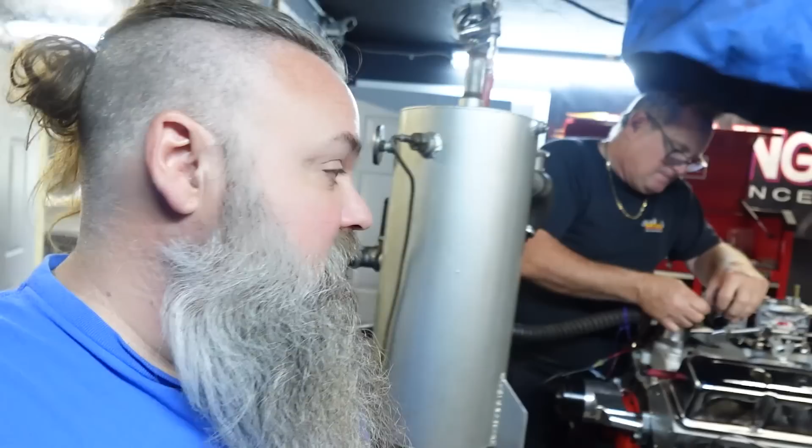We're going to start with doing jet changes, and it's a square setup in that carburetor, so we went from 87s to 91s. We're going to change from 91s to 95s, I believe, and then start changing things from there. Let me get all the pieces, parts inside. We'll go straight to changing out jets, going up another 4. So we went from 87s to 91s, 91s to probably 95-ish.

Where's that sheet you had that compares the drill sizes?

Also, for those curious about our dyno results from yesterday, we spoke with the gentleman that does the dyno software for this thing, so we're able to look at this differently, and we can confirm that it does cross over at 5252 where it's supposed to. It just looks weird on the RPM dyno sheet - on this it looks improper, but when we do it over time, we can verify, and if we look at the raw data, it does cross over at 5252. In our case, it crossed over at 470 horsepower, 470 foot-pounds of torque, I believe.

You can see our AFRs here are still pretty lean, so we're gonna knock that down and go for more fuel. Then as we add more timing to it, it's actually going to lean that out because we're introducing more air to that system. So we got to get this part figured out first, then we'll go after some timing and see where we end up. The nice thing is we've got a lot of data from other dyno pulls to compare to - like when Eric and Nick were here the other day, they pulled a very similar motor, 406, 10.5 to 1 compression essentially.

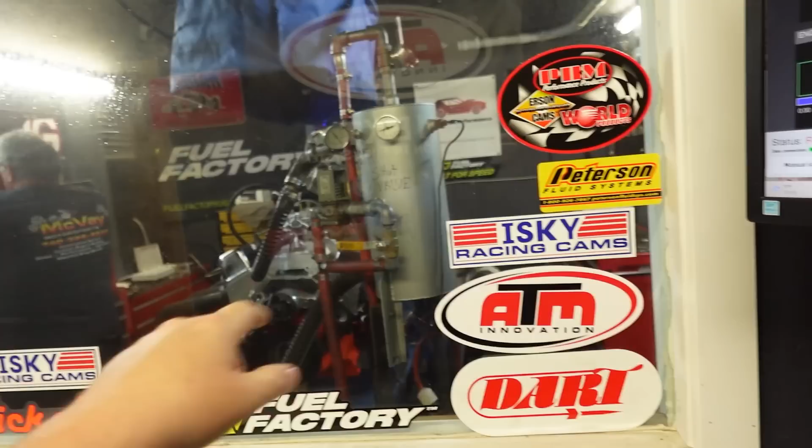Numbers before we start making a pull: 406 cubic inch small block Chevrolet, Jegs 205 heads, Jegs Cool Gap intake manifold, 535 camshaft, 1.5 rockers on intake and exhaust at this point in time, ATM 1050 carburetor. See what she makes. Time to put in your guesses.

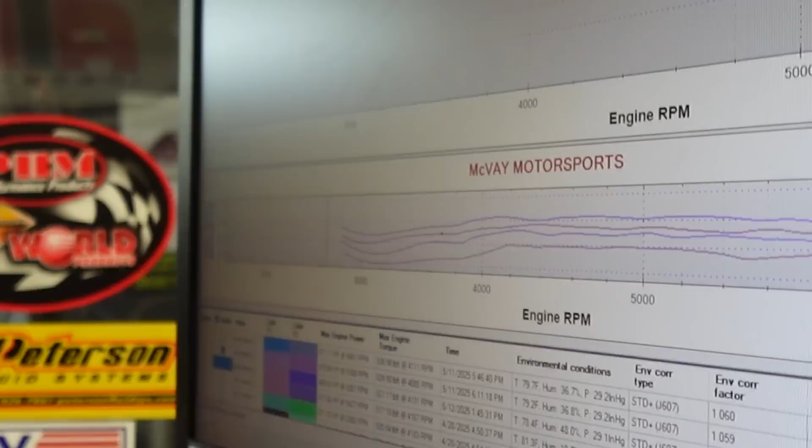It went up and made less power. Leaner is meaner, right? That's what I said - leaner is meaner. So the curve time graph looks very similar to last time. What is it, 466 at 5200, 427 at 4100. And the oil was probably not as hot as it was yesterday. See how it got richer? Got richer and made less power all the way across the board. Cleaner though, cleaner, but cleaner.

What's the... I don't like this RPM. I don't like it at all. I agree, it's harder to read. It makes it much more difficult to read.

See, it gained from there to there. Yeah, it gained almost a point - three quarters of a point. So the jet change brought half to three quarters of a point all the way across the board. Still, honestly, a little, depending on which of these AFR gauges are correct, somewhere between 12 and a half and 13 and a half, which is within tolerable ranges. The old adage of leaner is meaner obviously still makes sense. Our EGTs have come down maybe 50 degrees or so, a little more than that, so that's good.

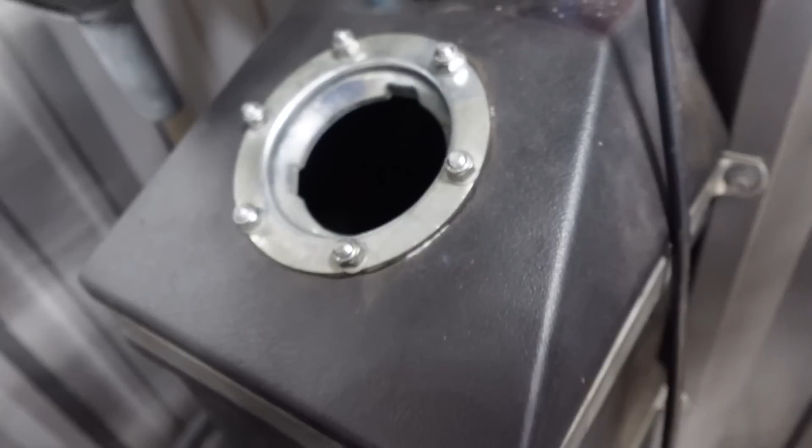Ain't got no gas in it. It's got fuel. No.

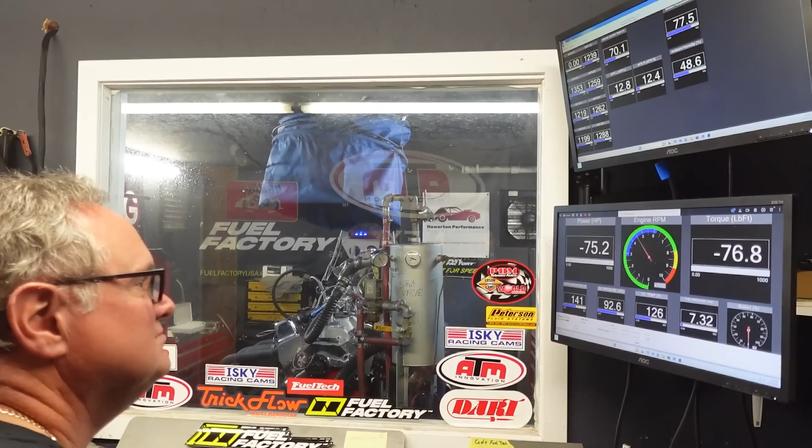Like that. So it went up from 471 to 479. Yeah, and actually made more torque too. So you moved up the power band. Let's see what the 100 did. 120 RPMs and moved it. Wow, okay.

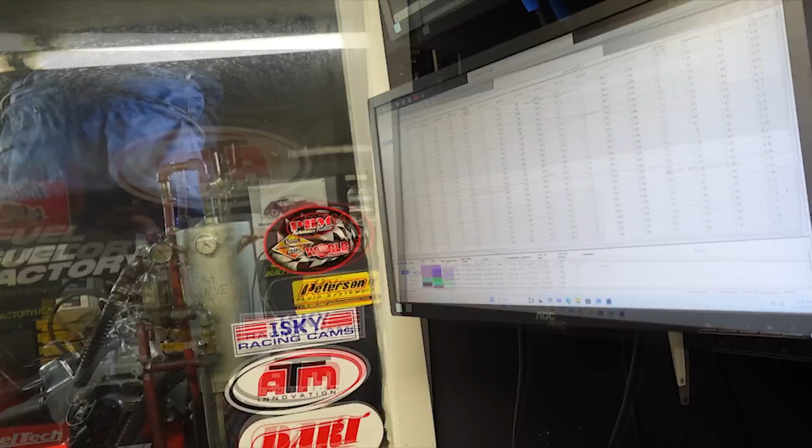Liked it all across the board. Came down and we got, actually it shows it richened it up a little bit. Okay. Yeah, this is 12 and a half, which is notoriously where everything likes to be. 50% humidity is good times. Let me see your spacer.

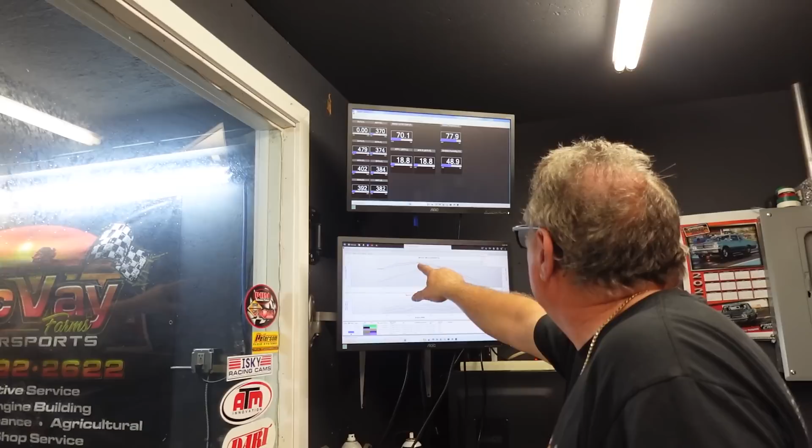Look at that on the RPM scale. Oh, ain't that a nice pretty? Yeah, it made more power all the way across. You see, it took that hump out of it there. Yep, you really liked it. And especially for a dual plane, it doesn't have a lot of wonky crossover.

So here's a question: does it make sense to throw more timing at it? Well, I'm gonna leave it where it's at. Okay.

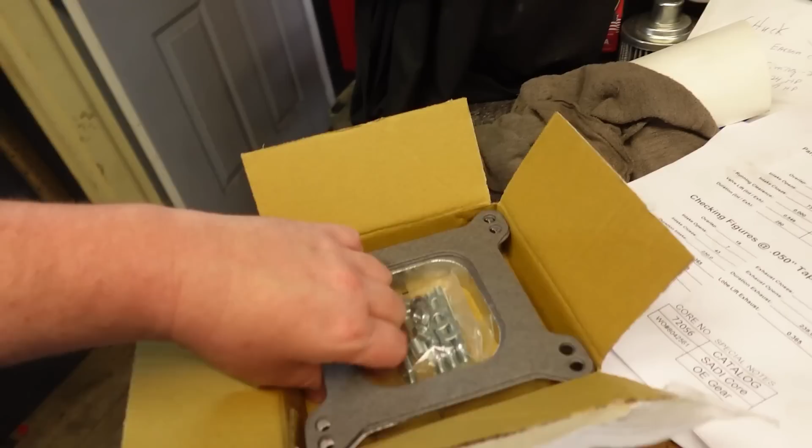All right, so open spacer, that's what Eric said we need to use. That's what we will use. You want to make any tweaks at all, or just pull this off, put a spacer on it? Yeah, put a spacer on it. Okay, traditional knowledge says this is going to make horsepower, usually at the cost of torque. It'll move that band just a little bit further, make more power. So we'll see what that does.

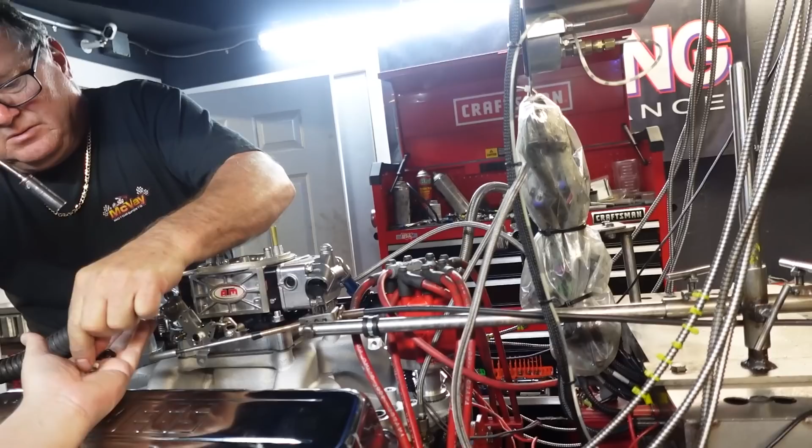All right, no more changes, just the spacer, right? What did you do with the other two nuts that you had on there? They had shoulders on them. They should have, oh the black ones? Black washer on them, I had black ones that were down in there. Like keeping the same. Alright, so 1-inch spacer, not touching anything else.

Alright, we had 479 on the last pull with just timing added. Now we got a 1-inch spacer on it. How much do we pick up? How much do we lose in torque? Do we pick anything up? I'd say we're gonna see 5 horsepower, lose 3 foot-pounds of torque. That's my guess, what do you think?

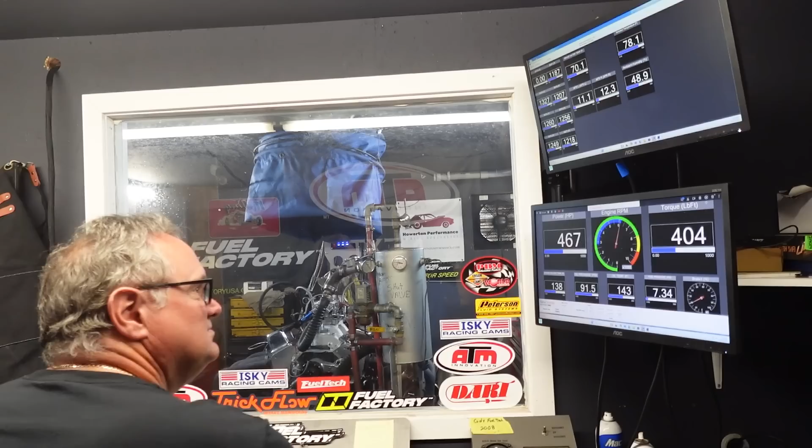Exactly what I said it would do. Steal from the torque, hand it to the horsepower. So 483 and 526.

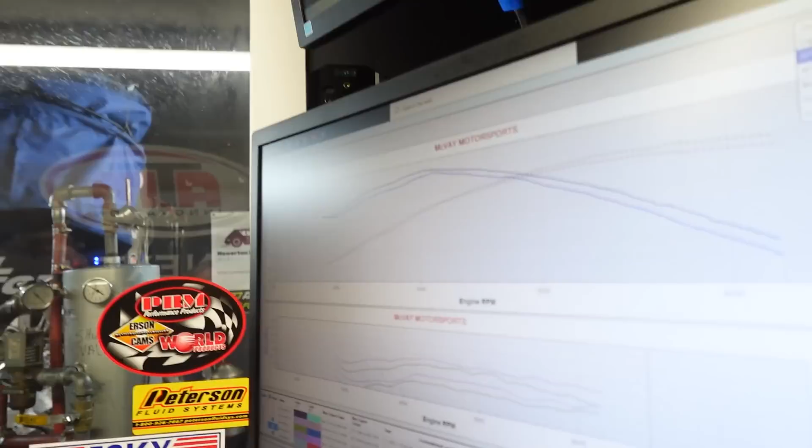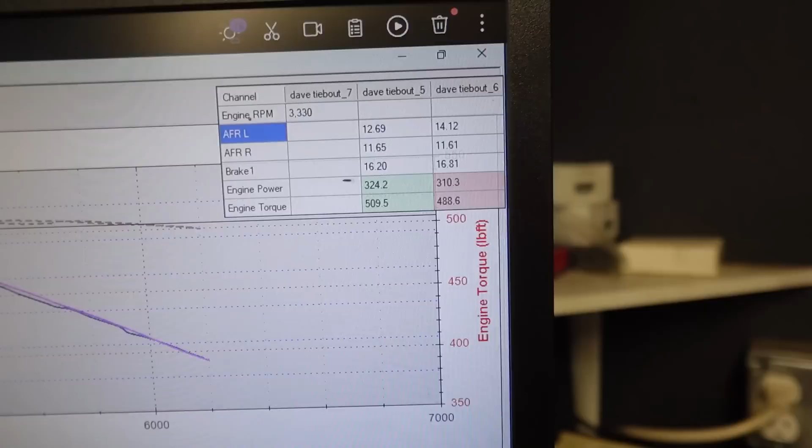I don't know that I would run that spacer. So this is the run without the spacer, that's the run with the spacer. The amount of area under the curve here, that you're missing torque. Yeah, but it's only, I mean, the split is not insignificant. It's probably 10, 20 foot-pounds of torque difference between those two. It depends on what you're wanting, 10 to 20, whether you want it on the car or not.

Yeah, I mean, you're going to pick up a little bit. Yeah, you gain a little bit out on top. And the question would also be, is there more timing that you could throw into that thing that would make any difference? But if you look at the... What's the plug look like? I mean...

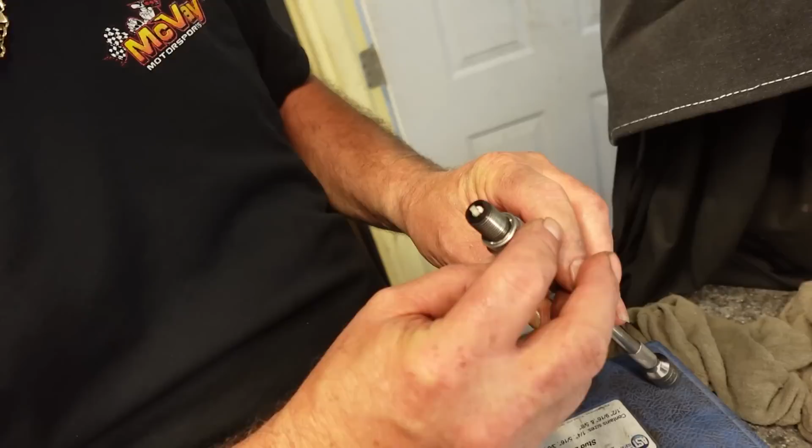I guess to me it isn't worth it, the timing isn't worth it. Yeah, if it's going to put it into the danger realm. Yeah, if you get maybe like you're gonna get 20 horsepower or more, out of a degree of timing, 2 degrees of timing.

You want to switch to the other plugs that I've got? I got a brand new set of 9s. I think I've been here before, is why I'm saying that. Yeah, I'm sure. Done this rodeo before? Yeah.

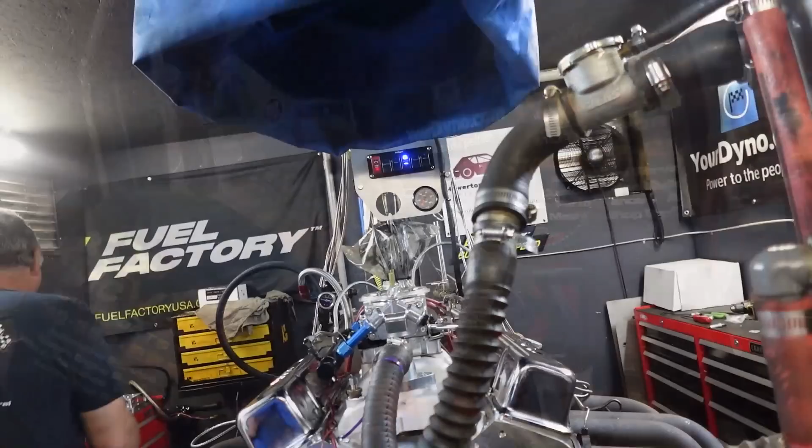I think we're just squeezing. Yeah, so you want to go 1.6 on the exhaust? Yeah, okay, so pull valve covers off, switch to... so what we could do is pull the plugs out of it, and then help us turn it over and exhaust, and then we'll put the new plugs in it. Yeah, okay. So pull valve covers, we're going to pull the plugs out, make it easier to roll this thing over, we're going to put the new spark plugs in it, and 1.6 rockers just on the exhaust and see if that helps us out. The question really is, where's the restriction in the system? Is it on the breathing in side or is it on the exhaling side? So the 1.6 rocker should help us expel that exhaust gas. We'll see what it does. The nice thing about doing this on a dyno is you can really truly actually test and verify this kind of thing.

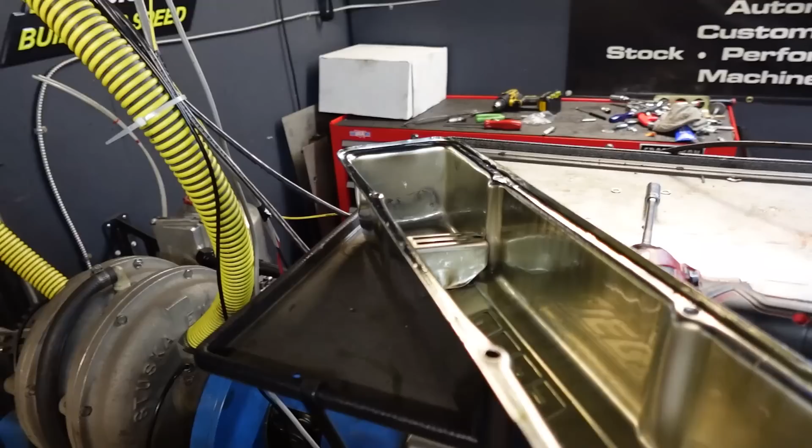Rockers are hitting the valve covers. So Bob's going to get some real race car valve covers. We'll see what happens.

Didn't care. Wants to run backwards, it wants to run backwards. So that didn't matter. Lost 10 horsepower. It almost made power down a little bit more down low and lost it up top. Interesting. That's not what I was expecting.

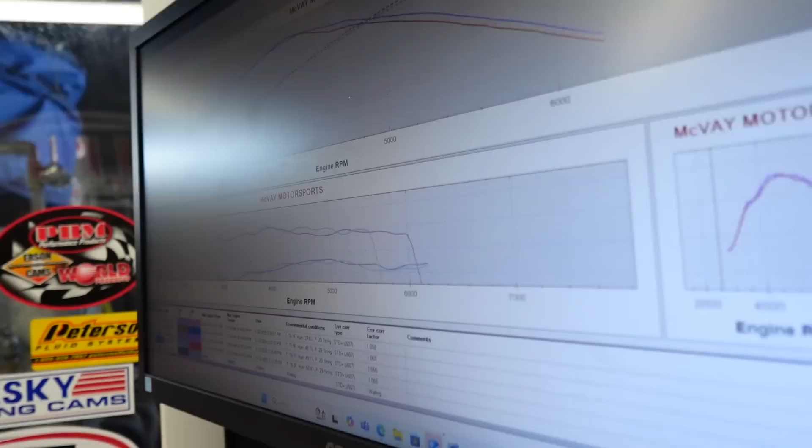AFRs more or less are unchanged. Would you want more timing with that? No, it isn't like we're trying to go from 25 to 35 degrees, we're trying to go 2 degrees. To get 2 or 3 horsepower isn't the option, I'm trying to get 20 horsepower. And if I can't make it there, I don't think it's going to make it.

So, you want to switch back to the 1.5s, take the 1.6s off? Well, we can, but I don't think there's any change in valve lash or any of that type of stuff. If you're going to change something, you've got to change the intake.

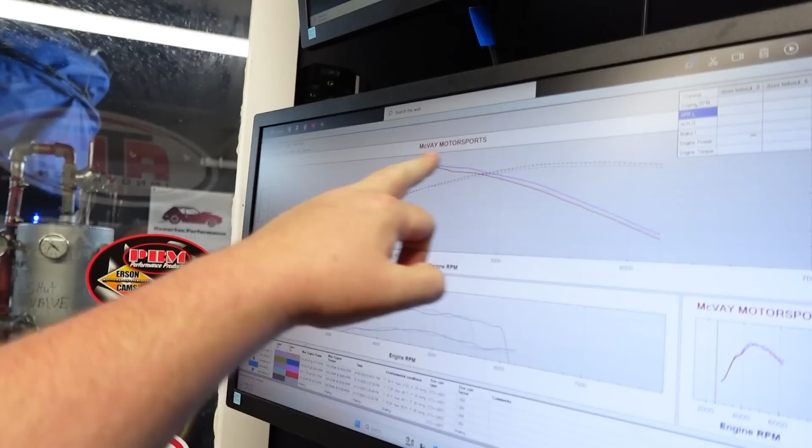We can put the 1.5s on there, but it did not change it. Yeah, it lost power. And it lost it in like a usable range too. So... I'm kind of shocked. I am too. Well.

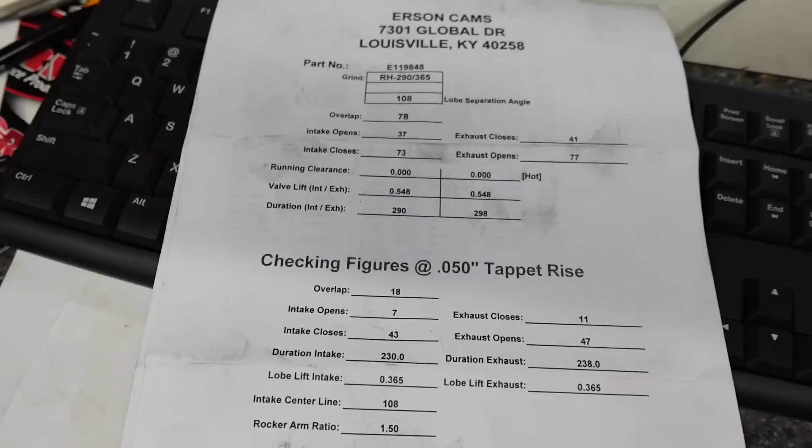So we went from -- for all of you guys who want to see the cam card, there she is. So we're essentially multiplying this because this is factored at a 1.5. And when you do it with a 1.6, it becomes, instead of like a 550, it becomes like a 580 lift, but only on the exhaust. But that also changes a lot of other things as far as how long that goes.

So what we're going to try next is new intake rockers. We'll see whether or not this makes any difference. And if it doesn't, we'll take this thing all the way back to 1.5 rockers and valve covers that we used before.

Now I do still have the other carburetor that we can throw at this. We could probably add a little bit more timing, but it's probably not going to make that much difference. And also you get to the point where

You don't really want to run this thing at 10/10. You don't want to run on the ragged edge of max power if it's more stressful or more dangerous on the engine. Splitting hairs over 5, 6, 7, 8 horsepower, you're not going to feel that in the butt dyno anyway. So why put the extra strain and stress and risk on an engine that's not going to be drag racing? This is a drag and drive hot rod power tour motor. It's supposed to be great in a car and be able to drive from point A to point B, put 12 or 1,300 miles on this thing, cruise, make good noises, and it would still make a hell of a pass. It's not like it's a dog of a motor. It would make plenty of power. But it is what it is.

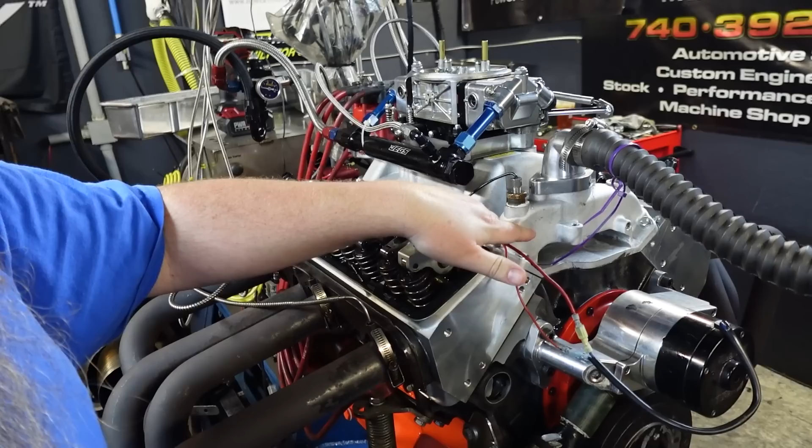What do you guys think so far? Where do you think our bottleneck is? Where do you think our restriction in power is? It makes plenty of torque, 530 foot-pounds of torque is great. But where's our issue with horsepower? Why is it not making more horsepower than it is? It's got a 1050 CFM on it, a 1-inch spacer on it, a dual plane intake manifold, but it is the Air-Gap one, so it should be good as far as airflow goes. Got 205cc intake runner heads, 10.5 to 1 compression on the bottom end, pretty decent camshaft. Where's our restriction?

Maybe it's the intake rockers. We'll find that out in a second.

All right, all 1.6 rockers. Still in the old plugs, we haven't changed those yet. Try and keep these one variable at a time.

This is gonna make more power? No. No idea. No, I don't think so. You don't think so? Think we're gonna lose power? It's possible. Because of those race car valve covers you put on here.

No other changes, just rocker change. So we should be at 580, somewhere in that range. Max lift, I think, on these heads is 600, if I remember correctly. So it's interesting to see whether or not this makes more power, or if we lose power. Please don't lose more power.

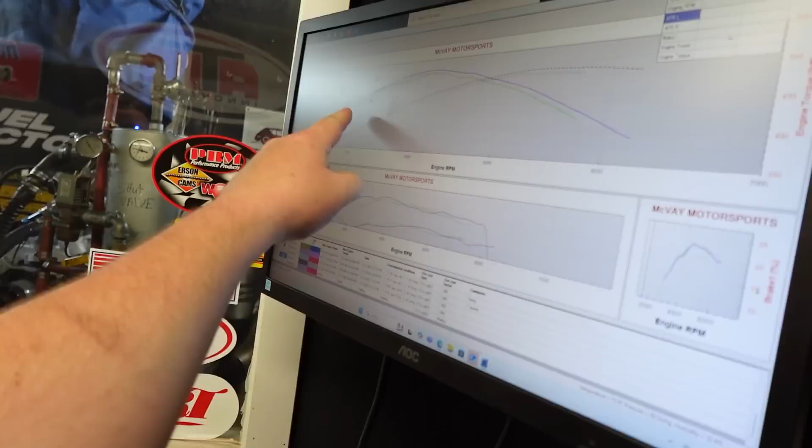I'm gonna explain something to you. A dyno number has never won the race, never. But all the expensive things and all the fancy tricks are making it less powerful. Hang on a second, it made a lot more torque up here, and then it laid over, and then laid over.

The AFR stayed pretty much where it needs to. So what's the answer to that?

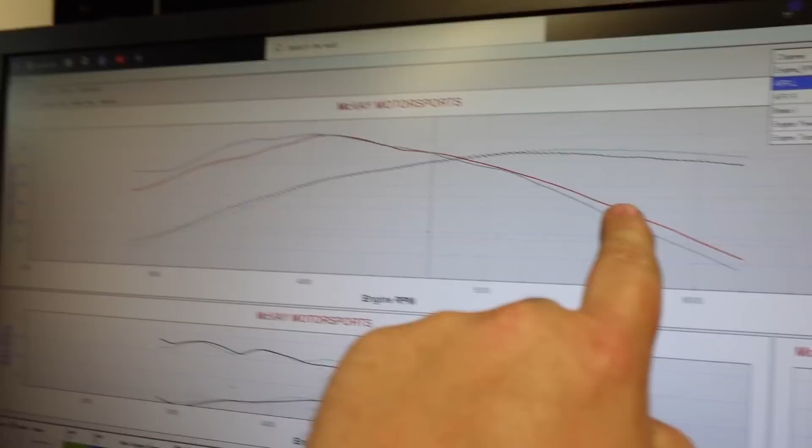Alright, so that's with the 1.6 exhaust rocker. That's with the 1.6 exhaust and intake rocker. So by giving it the intake rocker, we picked up a bunch of torque here, but we actually ended up losing torque out here, which means we lose horsepower out here, which is very interesting. I'm more for that low end torque, especially for a street drivable motor.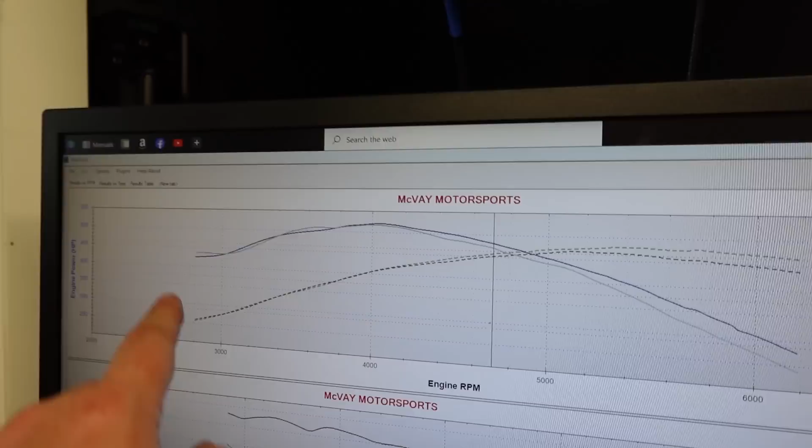Let's drop this one out and compare that against this one, which was just timing on the 1.5 rockers. And it made almost the identical sweep in torque, and then it carried it better. That was not what I expected. Not at all.

What's in your mind? Processing, processing, please wait. What? What? You guys working hard? Now this is my kind of work right here. Yeah, I know, me talking, somebody else working.

Alright, so just got off the phone with Eric Weingartner, he who knows all about head flow and that kind of thing. We do not know what these heads flow. If they are 240 CFM at 550 lift, we're probably running into a restriction as far as the intake goes.

What we are going to try next is we're going to flop those rocker setups. Instead of running 1.6s on the exhaust and 1.5s on the intake, we're going to flop that around, run 1.6s on the intake and 1.5 on the exhaust, to see if that gives us a better power band, because doing it off the exhaust only did not make sense. Doing it off the exhaust and intake did improve it back to kind of where it was, but it's still down on power. Oddly, the best power we've made thus far is just literally off of timing and some jetting.

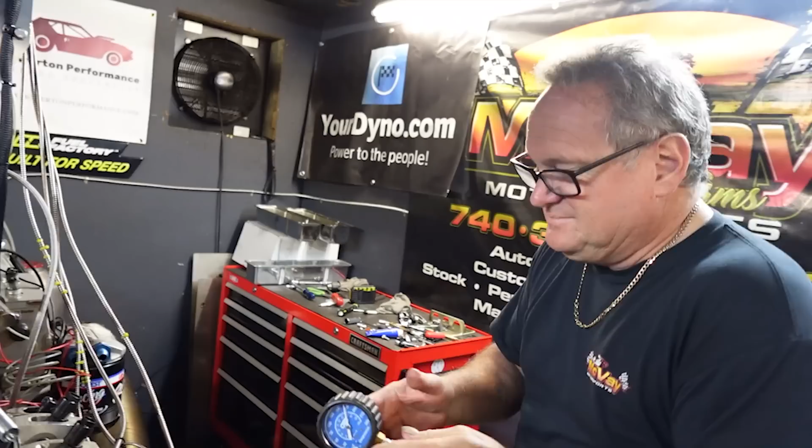Whoa, almost 200? 210, whoa. 20, and I can get 205. Whoa. That's a lot of crank compression.

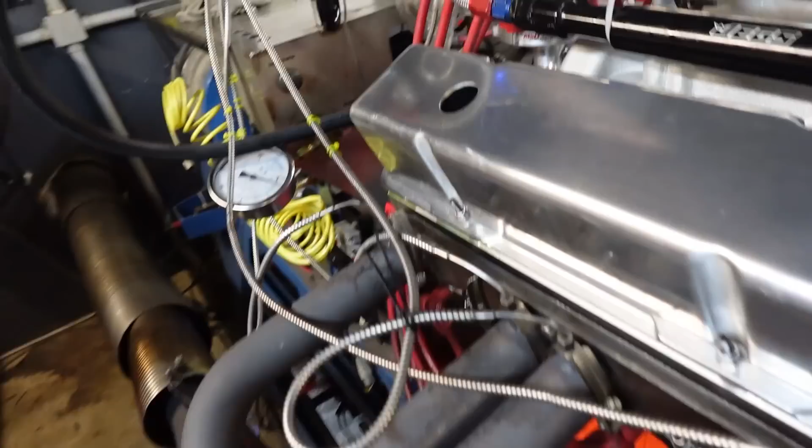Getting some heat back in this thing because it's been a little while since we had it down. Check, make sure we don't run out of fuel. Yeah, got plenty of fuel. So this is 1.6 on the intakes, 1.5 on the exhaust. Timing's the same, jets are the same, nothing else changed. Please God, find me my horsepower I'm missing.

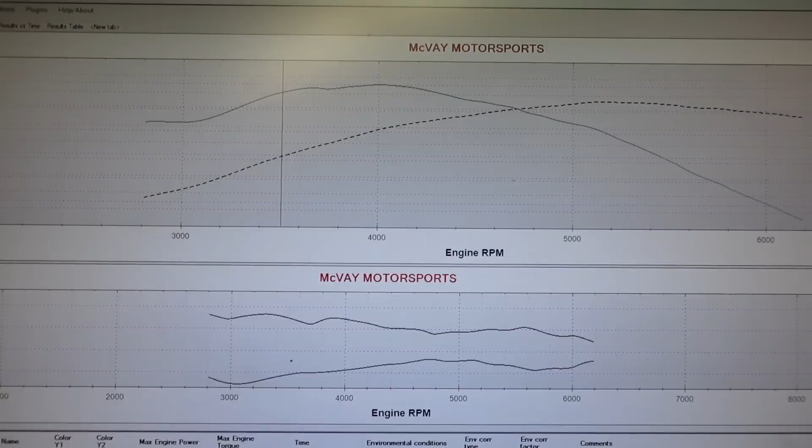Okay, so you can tell by my face I'm not excited about this. There's our run that we just finished. Peak power is 467 horsepower at 5166, and peak torque is 531 at 4,000.

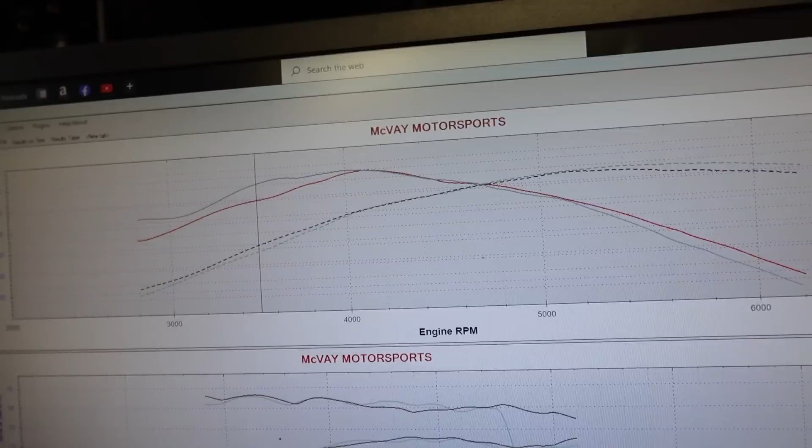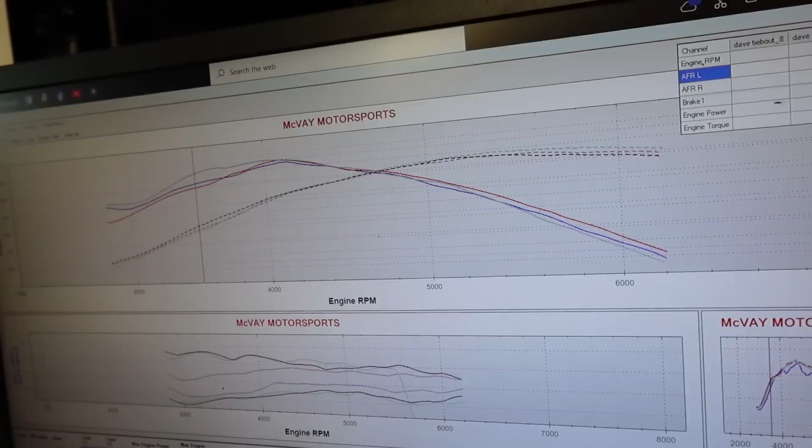But if we compare this versus the last one where we ran 1.6 on intake and exhaust, it picked up torque down here, but it's losing horsepower as it goes up in the RPM range, which is frustrating. And if we load it versus our first test of today, when we did jets and no other changes...

I apologize, I'm sure this is probably annoying to watch me do this, but if we compare this to the timing and the jets - so this is our most recent run.

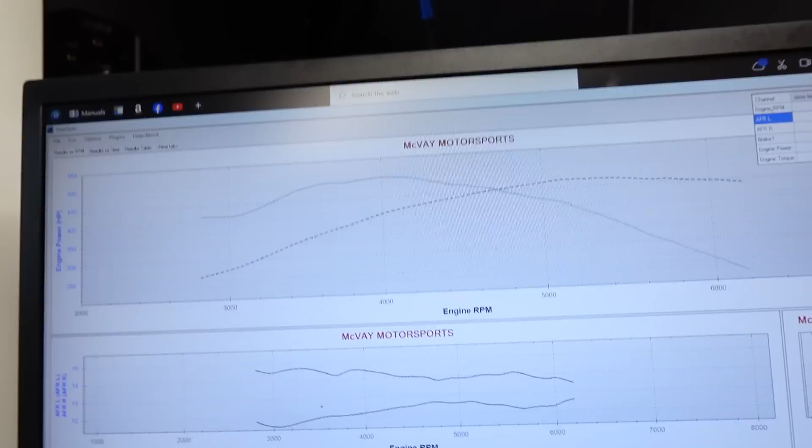This is 460, 468, and 531 versus that run.

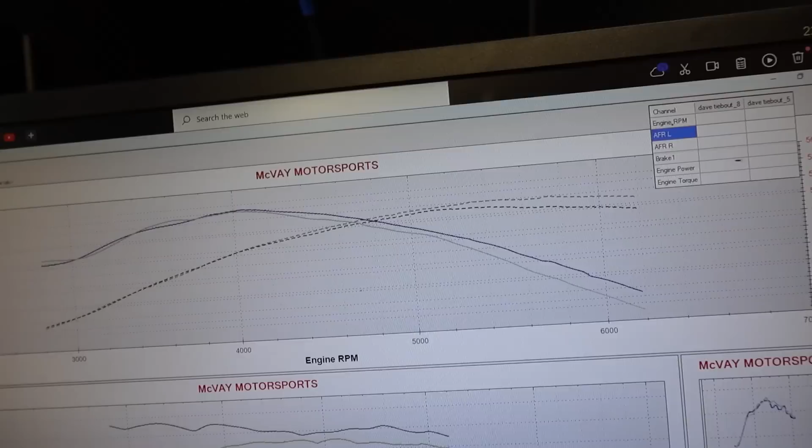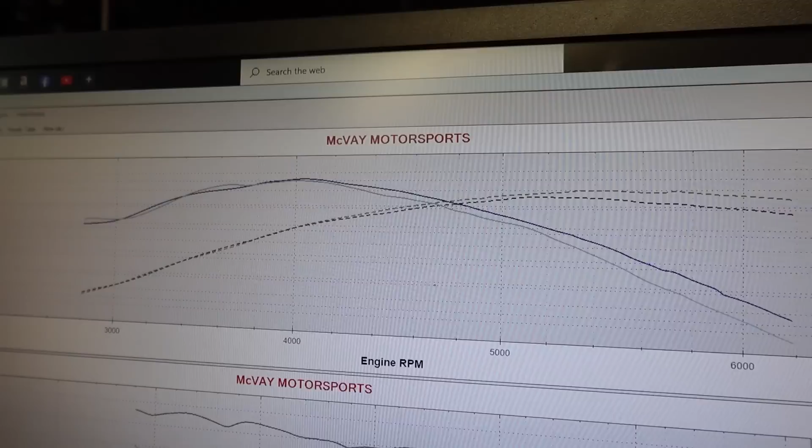That was jet changes, so we were nice on the jets, and 36 degrees of timing, which we have not changed. Look at that differentiation on the top end, where it's losing power across here. It's just losing power all the way across, which is really wild. We're down, excuse me, 300 RPMs on max power. Torque is basically the same. So it doesn't like the rocker change. It does not like the 1.6 rocker change, which is wild.

All right, we are back to where we were 4 hours ago. 1.5 rockers on intake and exhaust. Spacer's still on there. Timing is still set at 36 degrees. Jets have not been changed. So we're going to use this as a repeat run to see if we can back up what we had done before with the spacer on it.

And then I have no idea what we're going to do. We're all running out of thoughts. I guess maybe pull the intake manifold and see if our restriction is in the intake. Maybe just throw a big single plane on it and see what happens. I can't imagine that that's our problem, but maybe. I hope and pray that it does get better. It better.

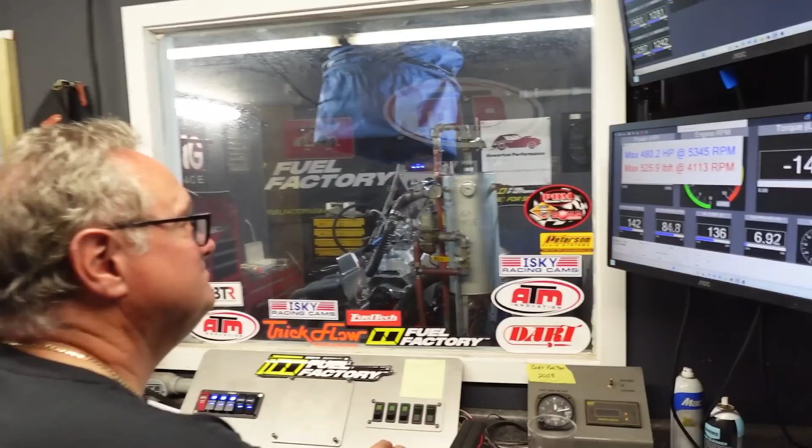I was concerned. Yeah, I really was. Starting to worry that something would hurt, or something was wrong? Why? Yeah. Why? I'm still thinking why. Why? Drop out that one and add that one.

Those two should lay over each other, which they basically do. We got another one on there. Okay, replicating results, there you go. It doesn't get any more replicated than that. You're within numerical, doesn't make a difference. Okay, so we're back to where we were at 2 o'clock in the afternoon.

So what's the answer now? Well... Fried chicken, peanut butter pie, and things like that. Pizza Hut. Oh man, I can't believe I didn't know there was a Pizza Hut buffet up here. I'm all in for that.

Oh my, so 480 horsepower, 526 foot-pounds of torque again. And that's basically where we were before.

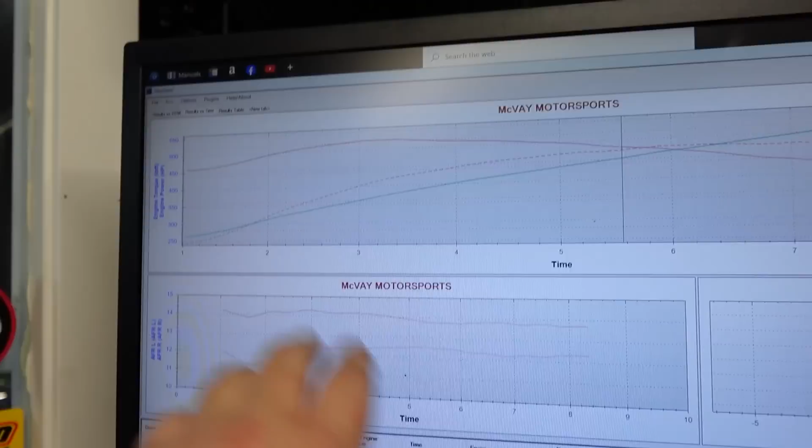If we go here and we load in, drop this one out, drop this one in. So this is the one where if we take the spacer away—and this is over time, just so you understand here, this graph is going to look a little bit different. But you can see over time where it made more torque without that spacer. And it made a little bit of difference as far as the actual horsepower goes, but honestly not enough for me to think about actually running that spacer. I'd prefer to have this torque.

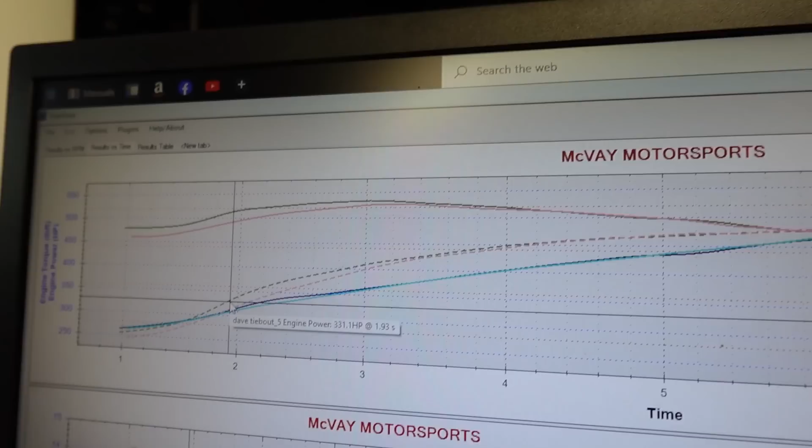So what do you want to go to? Big single plane? Yeah, the only one we got. See what it does, that way we can verify whether or not it's... Do you want it, before we switch the intake, do you want to put that Brawler on this thing or no? I can, it's up to you. Yeah, that's fine, it's got to be on there sometime. You want to put that Brawler on it real quick?

Yeah, okay, swap the carburetor real quick. I mean the Brawler, we got to get it to where it's ready for you to put in the car. Right, with your stuff. Right. And because ideally that's the idea with this, it's originally built for this. Take it off this and stick it in that. Yeah, hit the button, make it happen. Alright, let's get the carburetor swap going on.

I mean, either that or we could just put the carburetor on it, let it go, and do all that later. I mean, realistically speaking, if we want to do that, I'm fine with that. Because at this point in time, we're spinning tires and wasting time. Does it make sense to just go ahead and put the carburetor on it, leave the intake and stuff, and when we decide to pull the motor out of the car, we can test a bunch of other stuff? Yeah, does that make sense? Yeah, okay, less headache for you, hopefully.

Alright, so Brawler 850 mechanical secondaries, let's go get that swap done. Alright, Brawler 850 CFM mechanical secondaries.

That'll do. And it's purple. It's purple. So do you want the spacer plate in or not? No, I don't think so. I think we take the spacer out of it, because I want the torque more than I want 3 horsepower.

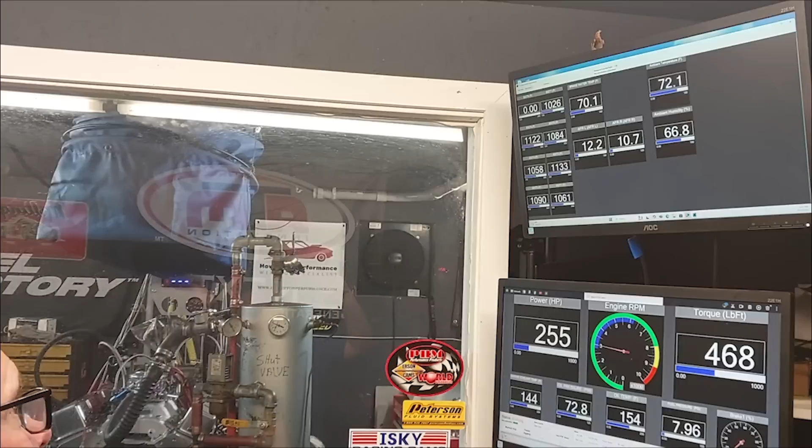Really clean, like scary clean. That's what we are, we're scary.

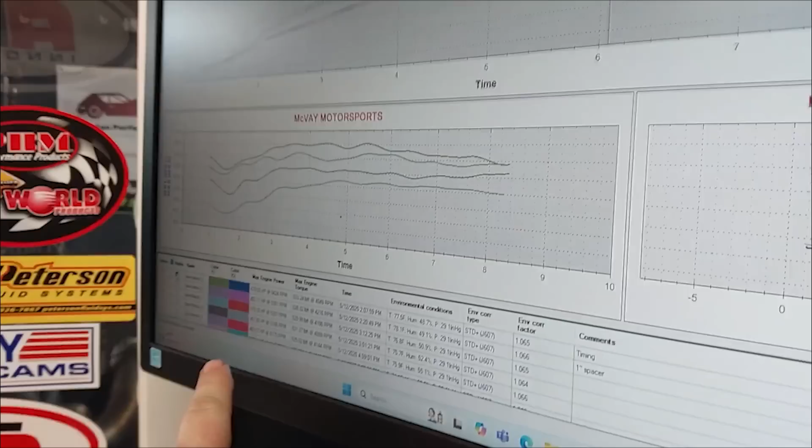I just wanted to make sure my ATM won the battle. So 470 horsepower and 523 foot-pounds of torque. Compare that with, scroll up, that run. Okay, so man, those are not far off.

I still like this one. Yeah, you still made more power. Well, but I like this graph better. Yeah, I agree, I understand the other graph breaks it down finer, which is kind of neat, but it's okay.

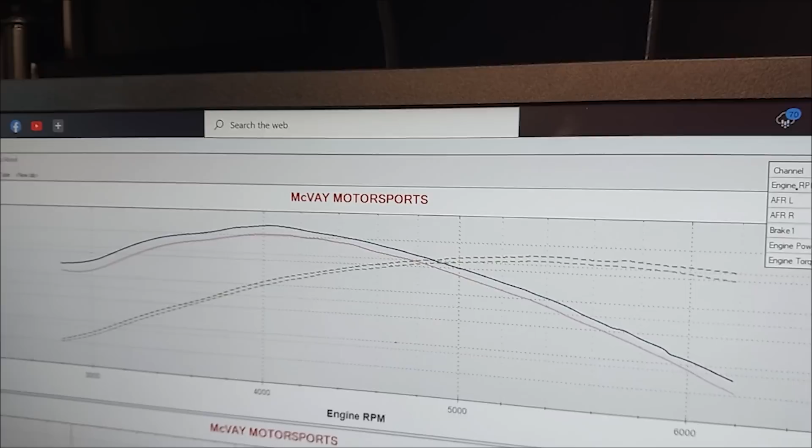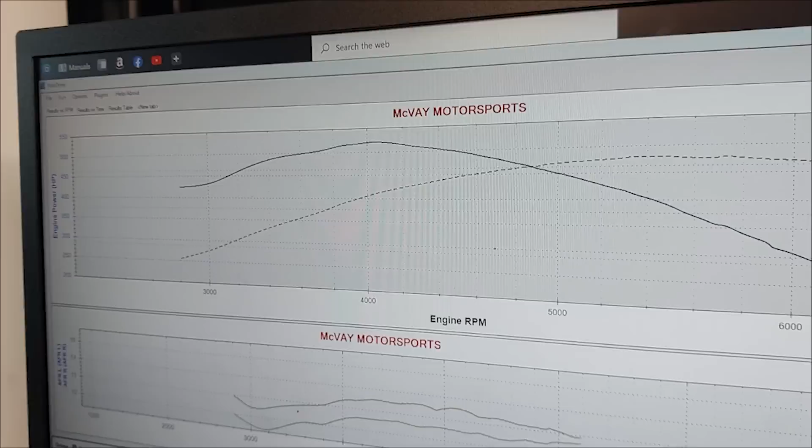I think it's a tad leaner. Oh, that's 3, let's see this one. Yeah, it's richer, it's richer. It's right in there. I think we gotta take a couple of jets out of it. And I bet you those lines line up.

It's interesting that doesn't change anything really at all. But then, when we richened it up with the other carburetor, it really didn't pick up much in power, just cleaned up the graph. You know, how smooth that is. Yeah, because I think if it's lean, you're going to see a little bit more of a dippity-doo in the torque side.

So what you want to do is pull this one off and put on this one. That's the last run, that's your last run. But see how smooth it is? Yeah, I don't think you're going to...

I have absolutely no idea what jets are in this thing. No idea, take a little bit out of it. Did you play with timing at all, or is it still where it was? Still where it was. Well, it's not a carburetor issue, we ruled that out.

Apparently, I need to buy Bob a starter too.

I would go outside and film it, but it's currently raining. If it decides to stop raining here shortly, I'll go out and get you an outside shot.

So we have bumped the jets down to try to lean this thing out a little bit. Leaner is meaner. We're not off by much. We're off a little less than 10 horsepower, a little less than 10 foot-pounds of torque versus the 1050. So we're about a half a point of AFR difference. Hopefully this fixes it, it's a pretty big step in the jet change there. We'll see, hopefully it doesn't go too lean.

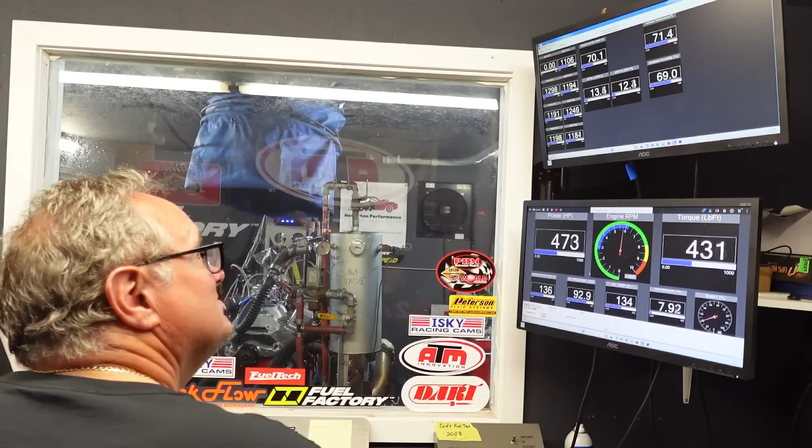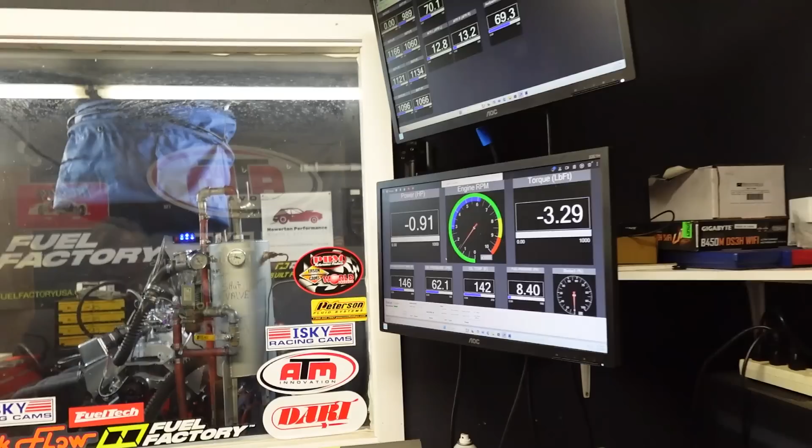We'll see what she does. Leaner is meaner, leaner is meaner, but it didn't go crazy lean. I think we're within spitting distance of where that 1050 is.

So the one that's toggling up is the pre-jet change. You drop that out -- oh yeah, it is -- so it made more power all across the band. Which it does, that's what happens. So 475 and 530, not bad.

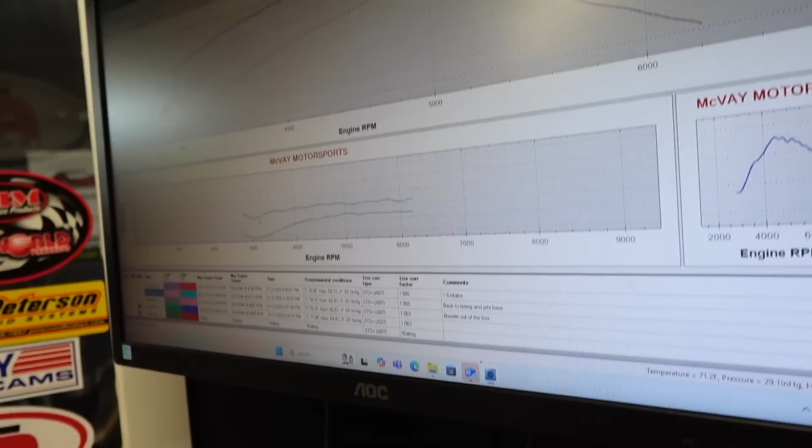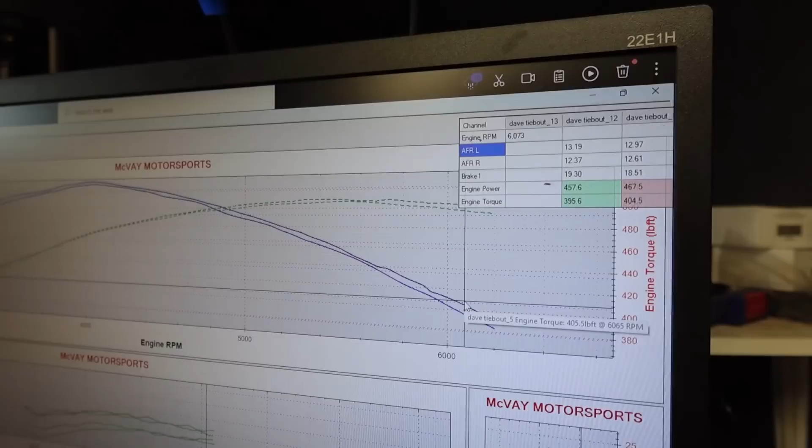And if we lay that over the jet change and timing from this one -- I mean, come on now, that's barely any difference at all. Maybe we're 4 or 5 foot-pounds of torque difference all the way through that. I think that's a winner, buddy, I think that's a winner. And it ultimately makes 10 horsepower difference on the top end, but that's all right.

We still don't know where our restriction is, but we are thinking intake. Eric would like to see us put the other camshaft in it, yeah, but we're not going to do that for this deal, we don't have time for that.

The only thing about it is that intake is leaking, I think, a little oil out the back. Originally it was leaking a little water out the front. If we were to put the other single plane intake on there, it would give us an indication of how that camshaft liked the big intake. That's true. And then when it comes back in and we send those heads off -- but then again, when we want to test those heads after Eric redoes them, if that's what happens, I'd like to test it with that camshaft.

With the one that's in it now? Yeah, so you can keep as much apples to apples. Yeah, so I think we leave it alone and then... Do you want to test it with the intake on it, with a single plane in this configuration, or do you want to do it after the... Well, what I'm saying is, because we got to pull that intake anyway, right? Well, I think so, I think it'd be wise.

I think it would be wise. I'm honestly okay with pull it, reseal it, and we'll deal with it later. Yeah, I think we've got enough data, we've done enough testing, that this is more than capable motor for what we're looking to do. Oh yeah, it'll be a decent motor for you to go out and have some fun with, with the hydraulic roller and stuff. We've pulled it a shitload of times, so I think that's where we're at with this.